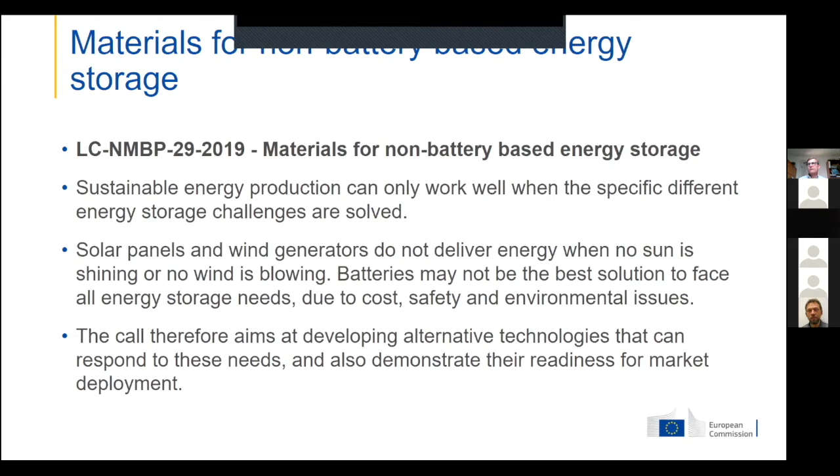So that's why we saw the need to develop alternative technologies to be able to deal with this problem.

And the obvious choice already at that time was, of course, either power to gas, power to chemicals, or power to liquids, also popularly called power to X, simply because of the amounts that we needed to store. There were other things, like in other time periods, compressed air energy storage, which could be used in the same manner, but it's a different time segment. And therefore, we needed to be able to cover the full time span of energy needs.

And one of the fundamental things about doing this is, of course, that we needed improved materials that had increased performance and also a reduced cost in respect to the available ones. And this is not something that comes easy. I mean, we can come up with new materials, but generally at the beginning, they're always more or much more expensive than the ones that are there.

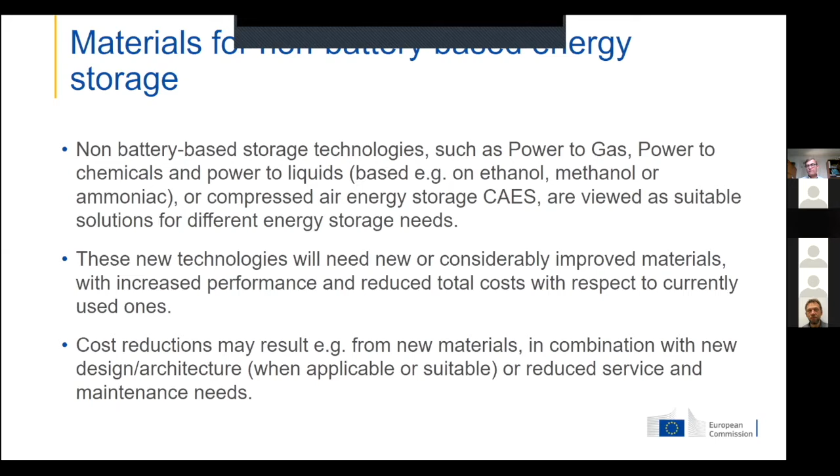And therefore, we simply needed to bootstrap this thing to be able to make new materials, in combination with new designs, architectures, and for instance, also reduced maintenance needs in order to be able to overcome this. So this was a very, very important topic for us at the time, and I think that it actually remains a very important topic. So what we've started with this call is by no means the end.

And that's why we need to pursue these goals also in the new framework program, Horizon Europe. And here we're going to be very ambitious in comparison to before, because we're going to change the strategy a little bit. So we will focus on scientific and technological excellence and strengthen the whole fundament for this in science and technology. And therefore, we also need to tackle political or policy priorities. This we've not really done to the same extent before. There we were doing point sources, a little bit here and a little bit there, but we were not really connecting the dots.

Today, we need to connect the dots in the whole value chain in order to be able to do this. And that means taking into account also the society as it is and the economy, investments to boost the innovation uptake and competitiveness. And therefore, we also need to make sure that everyone has a job, because otherwise it doesn't really matter. So the vision that we are pursuing is simply to have a sustainable, fair, and prosperous future for the whole of this planet.

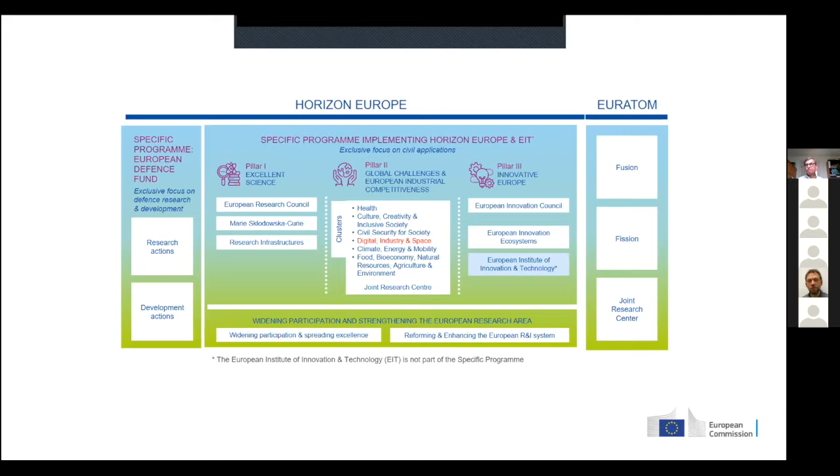One of the most important parts of Pillar 2 is Cluster 4, because it includes some of the activities important for industry. That means 4 DGs are working on this together: DG Connect, DG Grow, DG RTD, and DG DEFIS.

What we're going to try to do is accelerate the twin transition, as we normally call it - the green and digital transition - by working together so we can master the technologies and deploy them. We also need to make sure we have the autonomy to do this, meaning the means, raw materials, and structures, so that at the end of the day we can have a more climate neutral, circular, and clean industry, because that's the part of competitiveness which is absolutely necessary for us to succeed.

That means we need not only the industry with us, but also the people working in the factories, and we need society to help us launch this. Because we can come up with the best technology in the world, but if people don't want it in their backyard, we have nowhere to go. We saw that with other technologies that may or may not be important for the future, like nuclear energy - nobody wants a nuclear power plant in their backyard. We need to make sure everyone shares the burden for this.

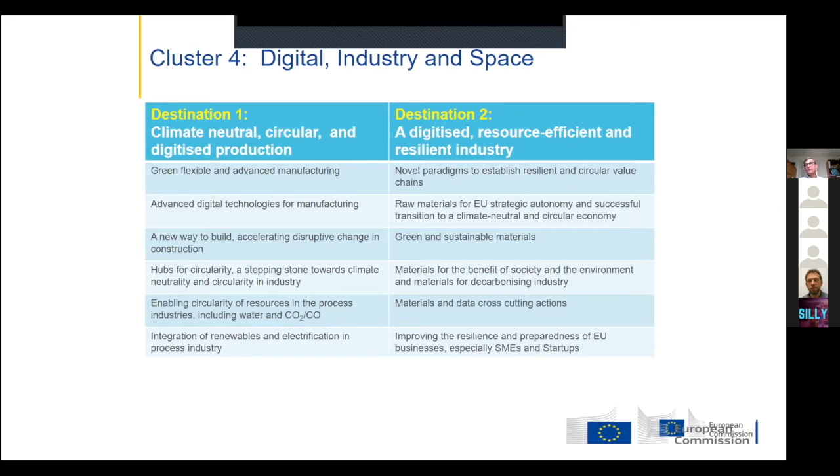We need to make sure we can cluster the activities in the right way, just like what you're doing here in terms of non-battery energy storage in general. So what is all this? You're the experts actually in this field.

I think we all know we need to integrate the technologies to achieve the goals we've set. It's not straightforward because it contains so many different elements - it goes all the way from making new composite materials for wind turbine blades, to new coatings on different things. These are very complicated things if we want to make them sustainable. And we need catalysts, which is pretty obvious, at least for us.

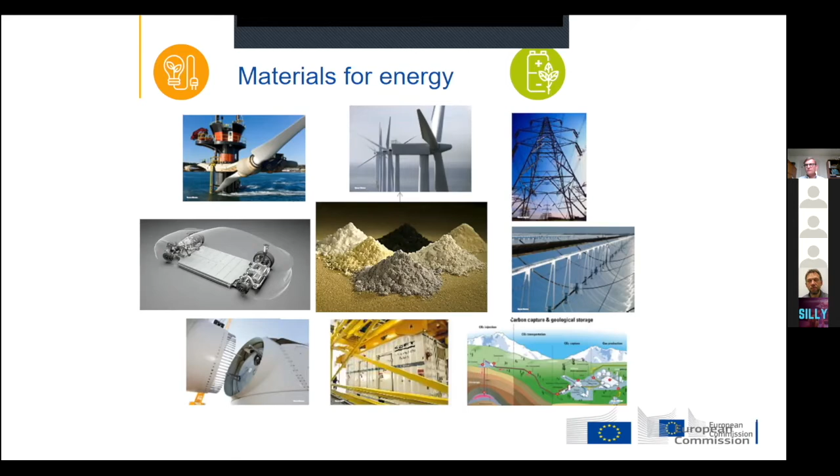We also need other things like membranes, surface coatings, and then the whole integration of all these things along the value chain. It's really important, because if we cannot demonstrate throughout the value chains that we're able to do this, we've actually achieved nothing. Then we have a technology that may be very nice, but we cannot show it's actually ready to go on the market. And that's what we have to do.

So the way that we need to go about this—and I'm not saying that this has to be the same for every field that we're dealing with—but we need to design the new materials that we have according to what the system's needs are. That means we need to start with some of the materials that we have. We need to model them to make new materials, to make them better performant and more cost effective, so that we can boost the whole transition, and also make sure that the materials we're using are actually available. Because we may have the nicest of product, but if it cannot be recycled, or if we do not have the critical raw materials to do this, then we are nowhere.

So we need to work along the value chain. We need to design them. We need to optimize the material. We need to be able to produce them, and we need to put them on the market.

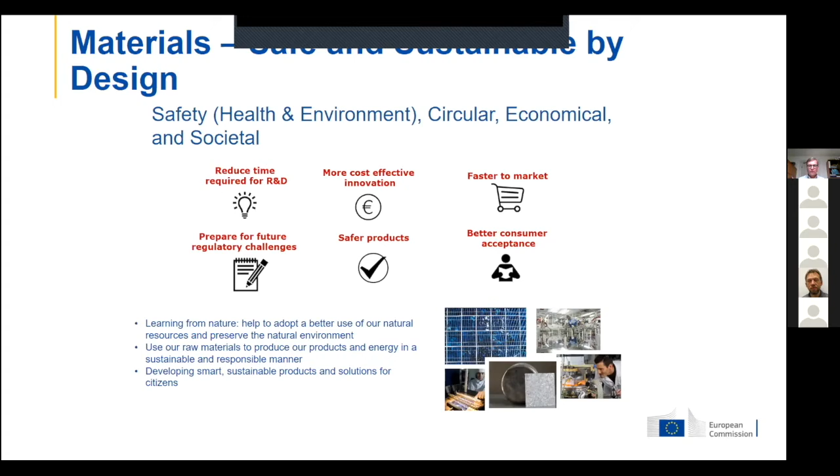And one of the elements to be able to do this is actually pretty fundamental—I think we've all at one point in time been exposed to this. If we cannot characterize it, if we cannot see the materials and measure its properties, then we cannot really use it for anything. Because in order to model materials, we need to have accurate data, and accurate data comes with better characterization.

So for us, linking characterization with modeling and development of models is absolutely essential. And like this, we can make new models that will allow us to make better and more efficient materials, so that we can model the whole value chain—not just the material itself, but also the actual CO2 carbon footprint of these processes. Because otherwise we're just spinning our wheels. It should not be gate to gate, but cradle to grave or cradle to cradle evaluation of the footprint of these things.

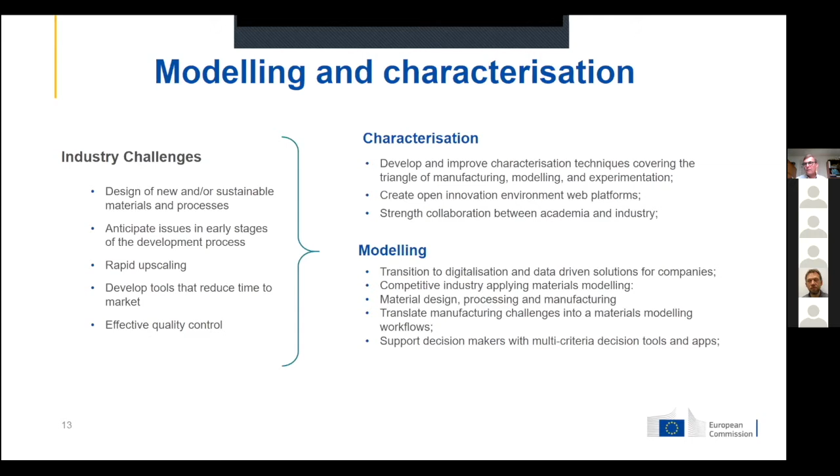And just to give you a few examples of what we're going to do in the future—and it's really not exhaustive, because otherwise I could use a whole presentation about this—there are some essential elements, and we're going to pursue all these things throughout this work program, but we cannot do everything at the same time. That's why we tried to prioritize those things that are most important first.

One of these things is the valorization of CO and CO2 streams into value-added products of market interest. We have new electrochemical conversion routes, and you're going to see several examples of these systems in the next presentations. It's really important that we have a broad palette of different technology options for doing this, because the catalytic systems we're going to need for the future are going to be completely different, or potentially completely different, from the ones we have now, because we're changing the systems.

And that means we also need to have an integration of hydrogen, for instance, as one of the major elements in this whole chain for replacing fossil fuels. This is not going to be easy—it's going to take a long time, because we all know that making hydrogen has a big energy penalty. The more we can reduce this energy penalty for making hydrogen, the more we can have hydrogen available to use.

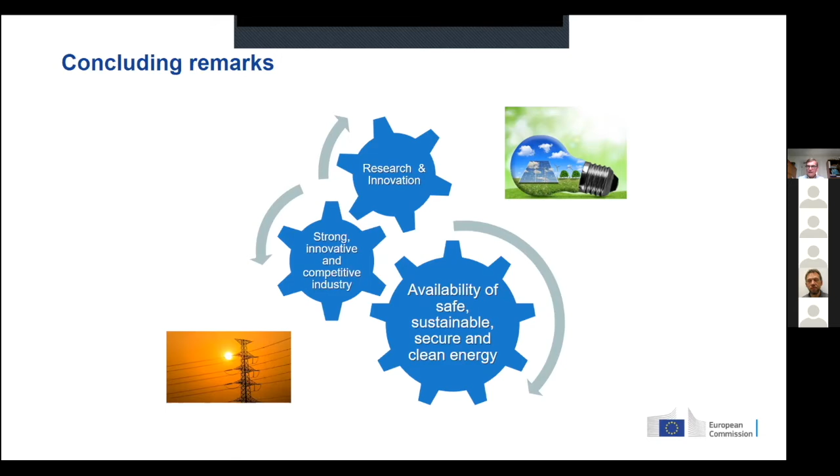So with that, I would like to thank you for your attention, and you can get some more information also about HADEA, which is a new agency, on the blog. And I'm at the moment heading the industrial technologies of that. So I'd like to thank you very much for your attention, and I wish you all the best for the rest of the workshop. Thank you.

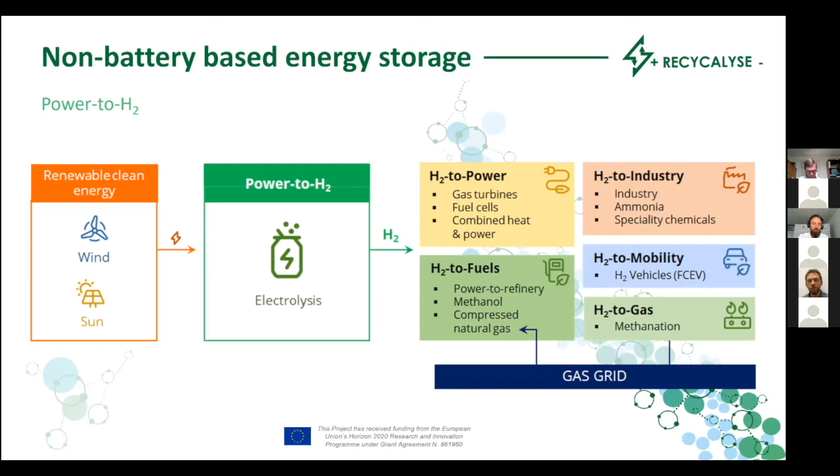Hydrogen can be produced from electrolysis, and that could be from renewable energy sources, and it can work as an energy storage medium. It can also help to overcome the irregularities of renewable energy sources. And then it can possess a very great potential to limit the use of fossil fuels in the near future.

So on to electrolysis. There are several types of electrolyzers. I've listed some of the most well-known, which are first in the development. We have proton exchange membrane electrolysis, we have alkaline, we have solid oxide. They all have different pros and cons. This project is about proton exchange membrane electrolysis, or PEM electrolysis, where water is decomposed into oxygen and hydrogen using electricity.

The PEM consists of an anode electrode, typically with an iridium-based catalyst. We have a cathode electrode with a platinum-based catalyst. And then we have a proton exchange membrane separating the two electrodes. This whole construction we call the membrane electrode assembly. And this membrane, it allows for protons to travel through to recombine and produce hydrogen at the cathode.

The use of this membrane, which has a low ohmic resistance, has several advantages. First of all, it enables a very high efficiency of the PEM. It can operate at very high current densities. It can produce hydrogen at high pressures and also with high purities. And then we need no special safety equipment for operating the system. We use only clean water.

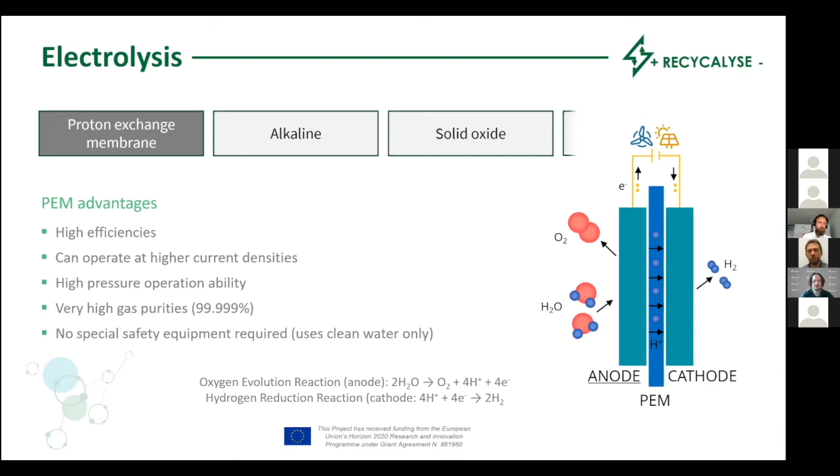This project here is about the materials at the anode, which are the most expensive and where materials development can have the most influence on the performance. And I will go a little bit deeper into that.

So the anode materials typically consist of these critical raw materials, iridium and also sometimes ruthenium. They are also called platinum group metals, and they belong to a group of extremely low volume elements. So they are very expensive, and not produced in very high rates. It's only around 10 tons a year for both of them, which is very low. And they have very huge CO2 emissions during the mining, especially for iridium, and they are also mined outside the EU.

All this causes significant barriers for the economy of these PEM electrolyzers and for hydrogen storage production. Actually, iridium and ruthenium are byproducts of platinum mining, so we have platinum also at the cathode, but used in smaller amounts.

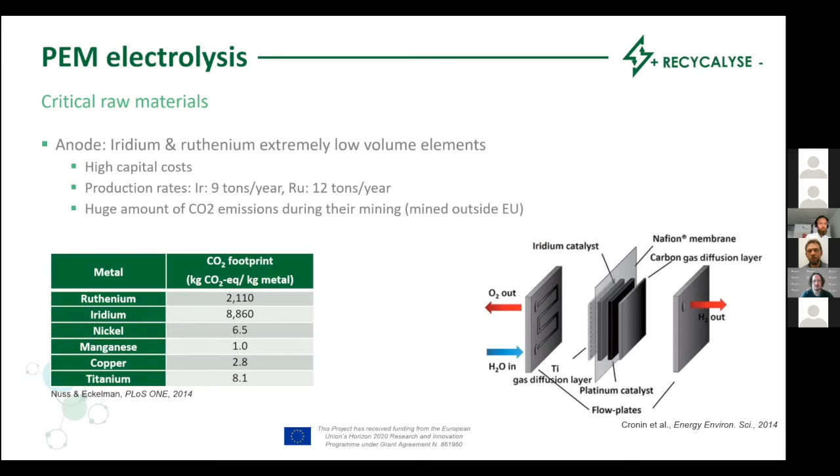All this tells us that we need new, improved materials for us to develop the PEM electrolyzers. So we need increased performance, reduced total cost, and increased recyclability. And this is in fact what the project is about.

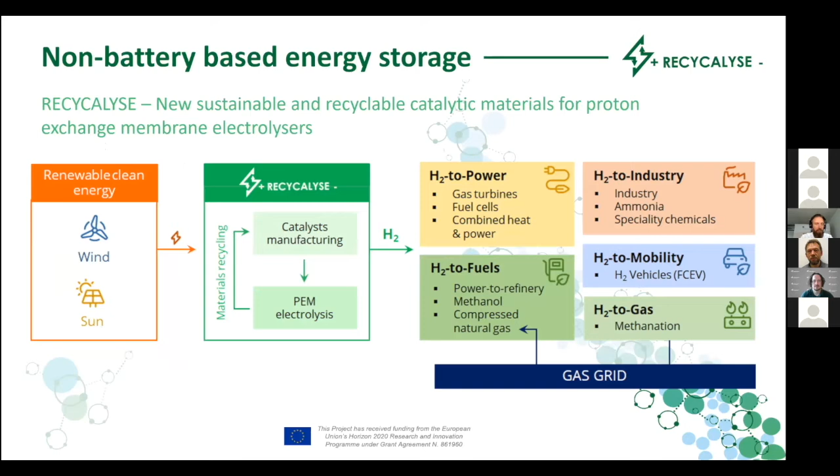In the RECYCALYSE project, we address the entire value chain of the PEM electrolyzer, all the way from catalyst manufacturing to system integration and demonstration, to end-of-life recycling, and then to supply raw materials for the catalyst manufacturing again from the recycled materials. The goal is to overcome the main existing barriers for PEM electrolyzers to penetrate the market, namely the price, accessibility, and performance of electrocatalytic materials.

To achieve this, we have two main objectives. First, we want to develop and manufacture highly active, sustainable oxygen evolution catalysts, which will reduce and eliminate the use of critical raw materials, thus decreasing CO2 emissions and reducing cost. Then we also want to establish a recycling scheme for the proton exchange membrane electrolyzer catalyst, for the electrodes, and for the overall system. By implementing all the recovered elements here in the new developed catalyst from Objective 1, we will reduce the dependence on materials import in Europe, and we will reach a circular economy.

So the circular economy is also depicted in the concept of the project, where we start with the catalyst production, where we need raw materials. We integrate the catalyst materials in electrodes for the device fabrication. These electrodes, via what we call membrane electrode assemblies, are utilized in electrolyzers for the production of hydrogen.

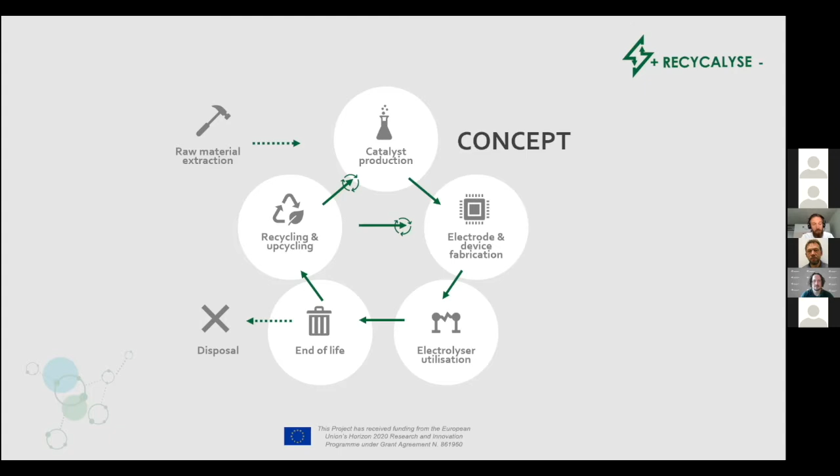Then we look at the spent membrane electrode assemblies, and see how we can recycle the materials, both in terms of recycling the critical raw materials themselves, creating new metal salts and new precursors for catalyst production, but also looking at these membrane electrode assemblies, how we can reactivate them and utilize them again for new device applications, and also how we can recycle the entire system, looking at, for example, the titanium flow plates used here.

All this is also reflected in the expected results. We have a result where we expect to have new stable catalyst materials with improved activity. We have more or less three groups of materials: supported iridium ruthenium oxide catalysts, catalysts with reduced critical raw materials where we alloy these catalysts with earth-abundant elements, and completely critical-raw-material-free catalysts.

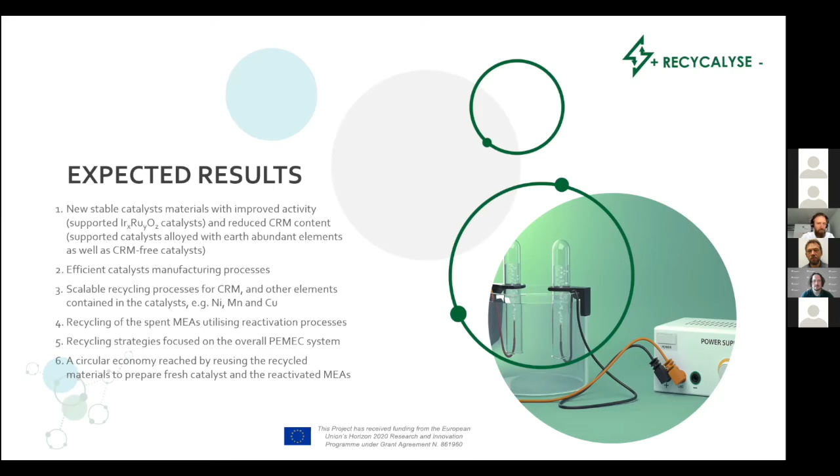We look into how to efficiently manufacture these catalysts, and how we can scale the recycling processes for critical raw materials and other elements contained in the catalyst, such as nickel, manganese, and copper. We look at recycling of the spent MEA, the membrane electrode assemblies, utilizing reactivation. We look at strategies for the overall PEM system, and then in the end, we want to have a circular economy by reusing the recycled materials to prepare fresh catalysts and reactivated membrane electrode assemblies.

Related to the concept, our project consists of 5 topics. We have materials, where we look at both catalytic sites and support materials. We have fabrication, where we look at fabrication methods for the catalyst, and fabrication of electrodes and MEAs. We demonstrate the electrolyzer systems where we use MEAs from the fabrication in a stack. Then we look at circular economy, where we look at materials recycling. And then we also have outreach and business development for the results obtained in the project.

So now I will give a small run-through of the different topics here, and then I'll give some highlights of the results achieved so far. The project is almost halfway through. It's a 3-year project, so a lot of these things will be preliminary.

Our approach, as I briefly mentioned before, for these novel electrocatalysts is to utilize support structures. This is inspired by fuel cell catalysts, where you use carbon supports, for example, for platinum nanoparticles. But here we have much higher demands on the support because of the high potentials and oxygen atmosphere at the anode. So the use of a support will enable the use of smaller catalytic particles. This will give a higher surface area and thus higher activities, but at the same time the support will make sure that we still get nice porosities in our electrodes.

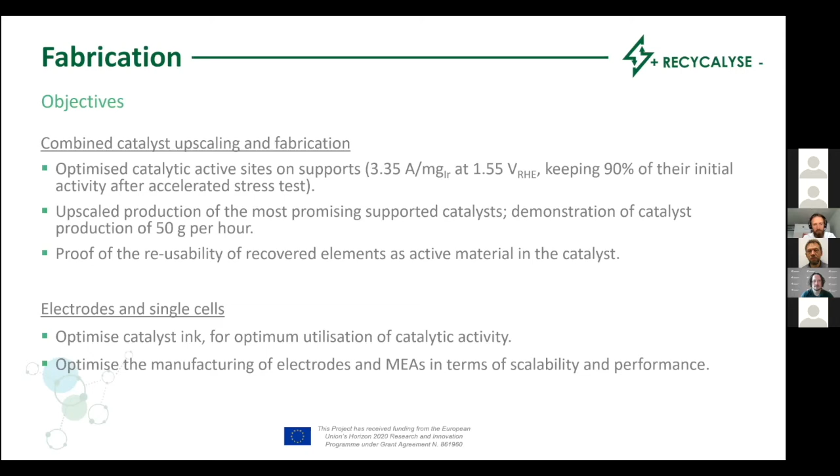We also look at the electrodes and the single cells, how to incorporate these materials, how to optimize the catalyst ink for the deposition onto electrodes. We want optimum utilization of the catalytic activity. This ink is going to be a bit different from, for example, standard iridium black catalyst because of these support structures. And we want to optimize the manufacturing of electrodes and MEAs in terms of scalability and performance.

For the demonstration, we will assemble a full PEM electrolyzer system using the materials from before in a developed stack. We will develop an electrochemical model combined with an overall system model for an optimized PEM electrolyzer system. Then we will test the functionality of the stack and the system.

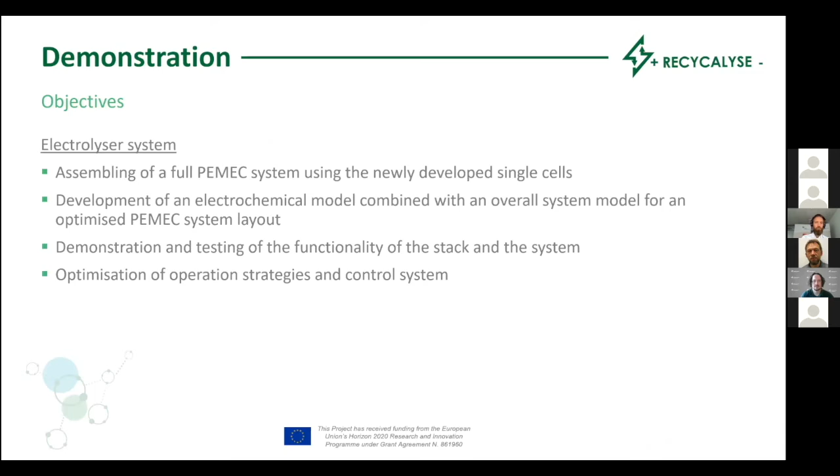For the first version of the stack, we have defined the specifications. We have assembled the stack, which consists of 14 membrane electrode assemblies. We have prepared the test stand for the stack and developed a control strategy for it. This control strategy is simulated based on information from the materials development and fabrication, and it contains both a control model and a stack model. We should be ready for a demonstrator test next month.

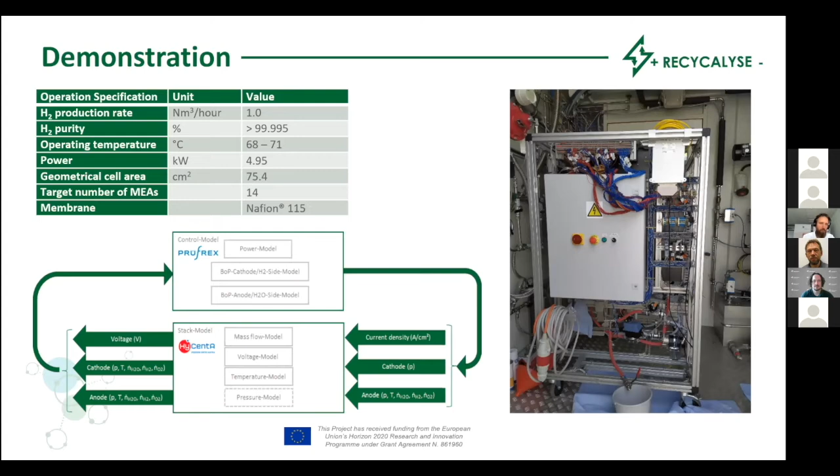So moving on to the circular economy, where we look at the following objectives for materials recycling. We look at the recycling processes for the recovery of the critical raw materials, so recovery of these platinum group metals, iridium, ruthenium, from spent catalysts, where we want to achieve more than 90% efficiency.

We also look at the separation of the elements for iridium, ruthenium, and platinum from additional metals in the catalyst or from contaminating elements. We also look at reactivation of electrodes using cathodic reactivation, where we can directly reuse the membrane electrode assembly.

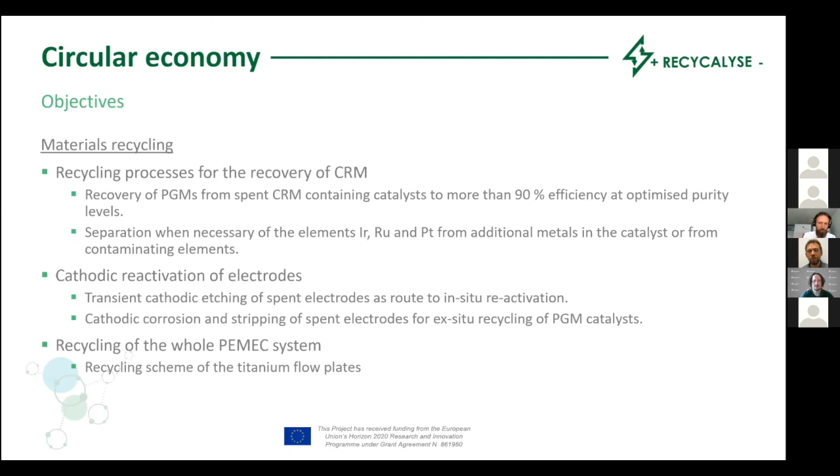And then we also look at the recycling of the whole PEM electrolyzer system, where we want to create a scheme where we also get the titanium flow plates back. So we've developed a scheme where we first do an automated dismantling of the titanium flow plates and the MEA structure. The MEA is then pre-treated in an alcohol water mixture to dissolve the catalyst materials.

We call this the dry residue, and we want to dissolve that from the membrane and the electrodes. This residue is then leached using a hydrochloric-based solution, creating PGM chloro complexes. Here we have achieved leaching efficiency, in this case for platinum up to 100% and for ruthenium up to 90%.

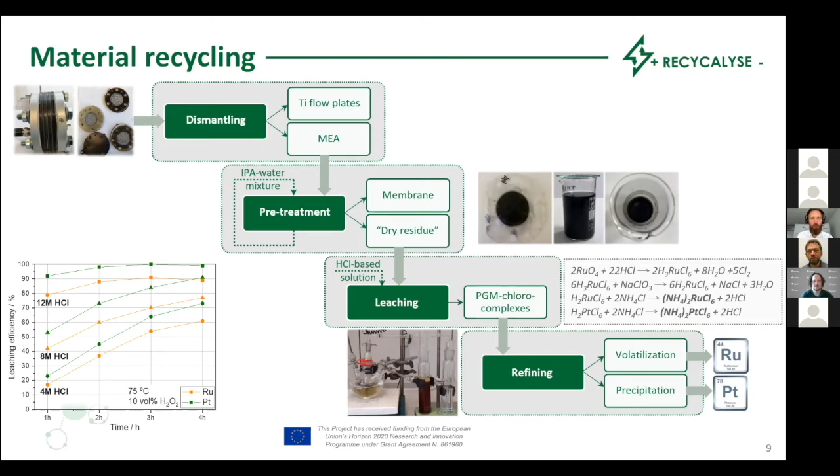We then refine these complexes, creating the final PGM precursors, which is followed by a separation step, volatilization for ruthenium and precipitation for platinum, where we can get the individual precursors. These precursors are now ready for us to test them for synthesis of our materials.

So, as mentioned before, we are halfway through the project. And if we keep the goal in mind that we want to overcome the main existing barriers, which is the use of these PGMs, we can see that the usage of these support structures has great potential for reducing the critical raw materials. We're already beyond state of the art by using support, before even making the alloying of non-critical raw materials really work.

This is still work in progress. We can see so far that the use of completely non-critical raw material catalysts can be a very huge challenge; it's still also work in progress. We need to still optimize the material utilization in the membrane electrode assemblies. We can see so far that we can most likely lower the catalyst loading quite a lot, also with the current materials, while keeping good performance of the membrane electrode assembly.

The first generation stack, as I mentioned, is ready for system implementation and demonstration. We will have a second generation stack to produce later on the project, and recycling of the project-developed materials is in progress, and we are now ready to use the first precursors for new catalyst. With that, I would like to say thank you for your attention.

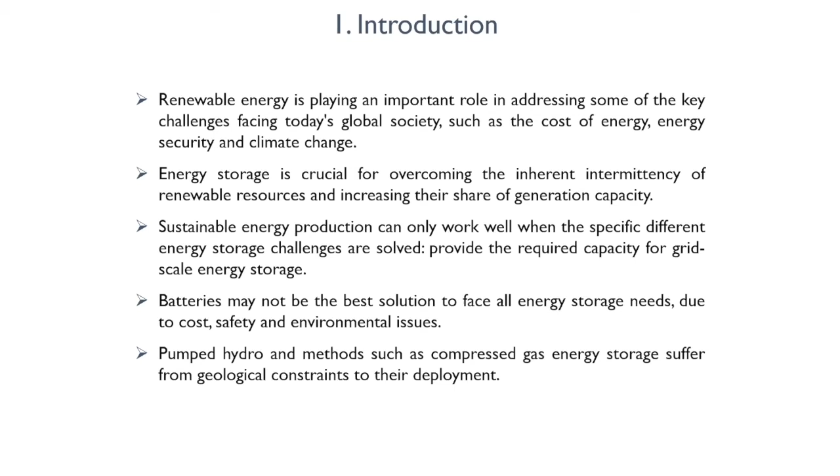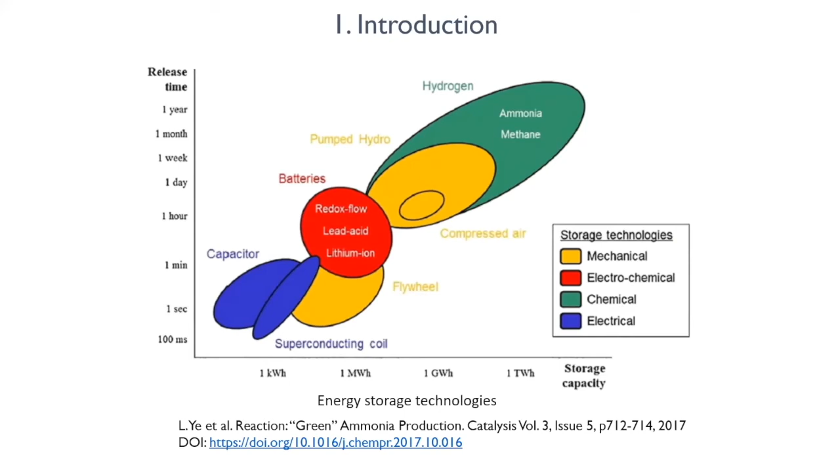So the non-battery based storage technologies have power to X, like power to gas, power to chemicals, or power to liquids, that could transfer renewable electricity into synthetic gases, hydrogen, methane, or other gases or chemicals, are the more suitable solution for different energy storage needs. So the point is we have to have sufficiently flexible mechanisms to allow large quantities of energy to be stored over long time periods at any location - this is chemical energy storage via hydrogen or carbon neutral derivatives.

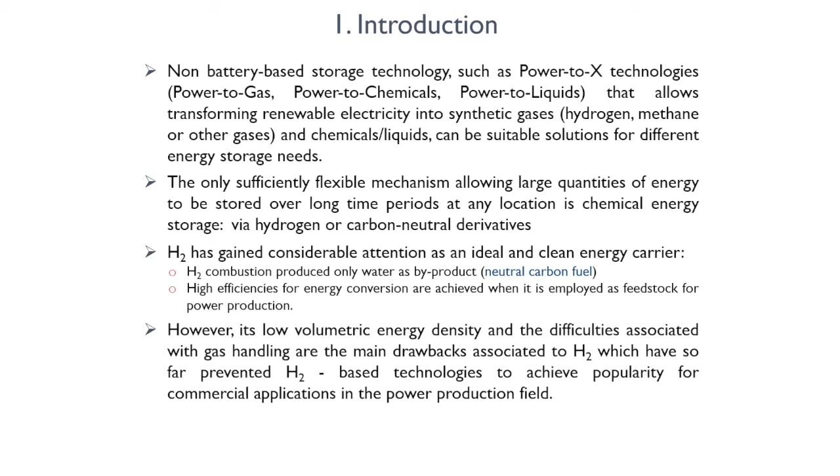Just click one more time, please. So between these, hydrogen has gained considerable attention as an ideal and clean energy carrier, because they produce water as a byproduct and has high efficiency for energy conversion when employed as feedstock for power production. But one drawback is the low volumetric energy density and difficulties associated with gas handling of hydrogen. So the best way - just click one more time - the solution is to have the hydrogen stored in chemical bonds or hydrogen carrier compounds.

So this next, use press. Yeah, why ammonia? Ammonia, because it has a high volumetric energy density between the zero carbon fuels, higher than the one we can obtain with hydrogen. It has a relatively low cost, easy to be liquefied. It can be liquefied at room temperature with 7.6 bar gauge, for instance, at minus 33 degrees centigrade, 1 atmosphere.

Easy to store and transport. We already have large knowledge about the transport and storage of ammonia due to the use of ammonia for fertilizer as a feedstock for developing fertilizers and their chemicals. And the main issue is it's carbon free.

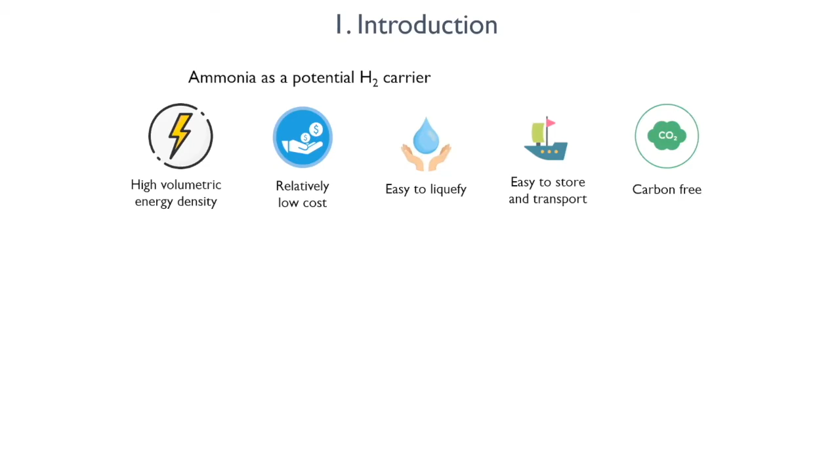Ammonia is made of nitrogen and hydrogen. We can store it for the time we need, and then use it directly for energy production, as fuel for internal combustion engines, or as fertilizer. You can also produce hydrogen via ammonia decomposition for use in fuel cells for electricity production, or for a hydrogen refueling station.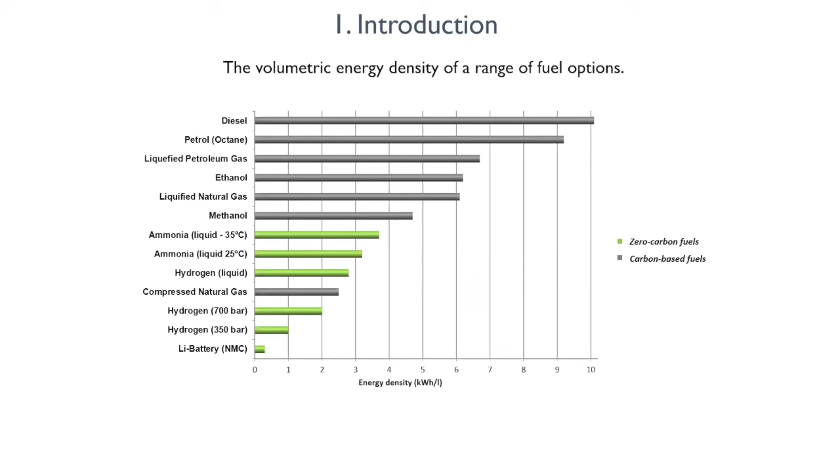This is why the AreNHa project aims to use ammonia as a green hydrogen carrier. For that purpose, it develops its main activities around green hydrogen production, ammonia synthesis, ammonia storage, ammonia decomposition, and other direct energy uses of ammonia. It's a 4 year project with funding of around 5.7 million euros.

The main goal is to develop, integrate, and demonstrate key material solutions that enable the flexible, secure, and profitable storage and utilization of energy in the form of green ammonia.

In the project, we are going to demonstrate the full power-to-ammonia value chains at TRL5, and the potential of green ammonia to address issues of large-scale energy storage.

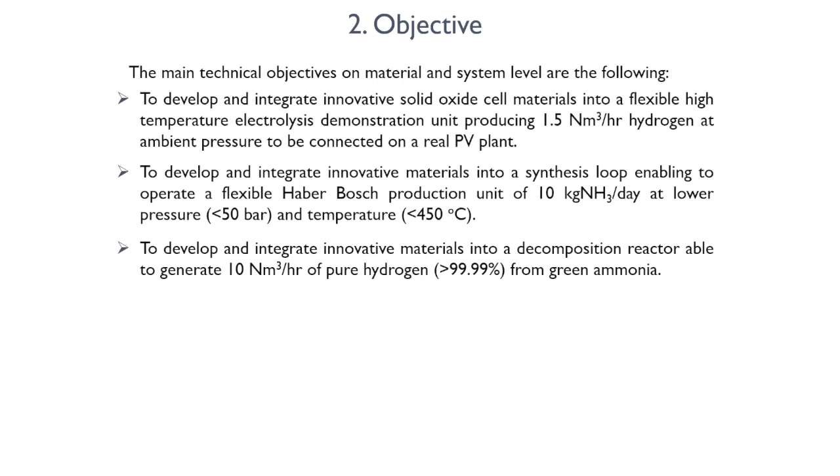The partnership includes 11 partners from 7 countries, with 5 SMEs and industries and 6 research centers and universities from around Europe.

Here you see what we're going to do in the project. We are going to develop new materials and processes at lab scale for green hydrogen production using high temperature electrolysis with solid oxide electrolysis cells. We will also develop nitrogen through an electrochemical process, as well as ammonia through an electrosynthesis process—so green nitrogen and ammonia production.

Then we are going to develop ammonia through an advanced Haber-Bosch process, and solid absorbents for solid storage. This will be used for ammonia decomposition via membrane reactors, to produce hydrogen that will feed PEM fuel cells and also a hydrogen refueling station.

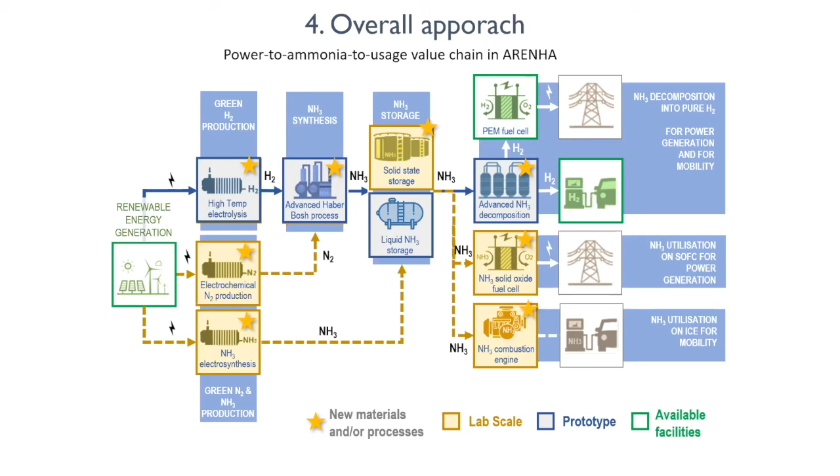Let's move to the next slide, please.

So the idea: we have the development of the materials, and for all the system we have the modeling part, studying the system integration as well. Then work package 4 is to develop the components for the prototypes, for the demonstration, and then we have the validation at Centro Nacional de Hidrógeno.

Proton Ventures is the company developing the Haber-Bosch process. In parallel, we have the business case led by ENGIE, a French company, addressing the market value chain, go-to-market strategy, and IPR — the go-to-market and business implementation of all these technologies. We also have a work package dealing with societal acceptance, environmental life cycle analysis, life cycle cost analysis, and safety assessment, led by ENGIE, with Centro Nacional de Hidrógeno also involved, plus dissemination, communication, and management activities.

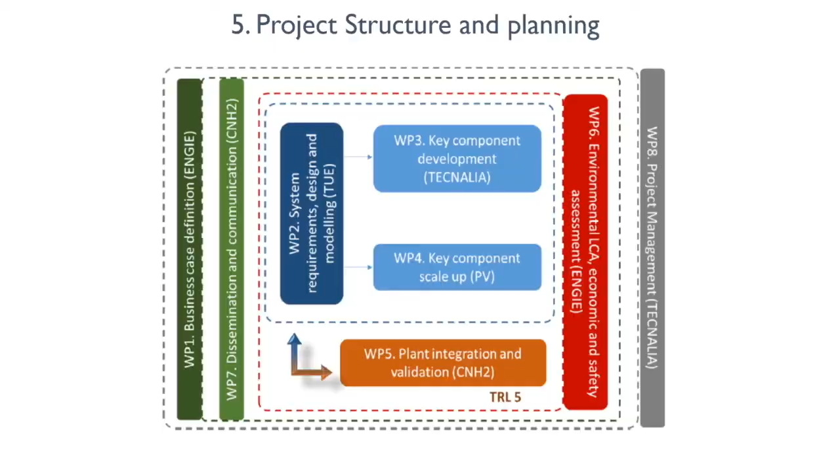Main impact: we have several impacts from the project. We decrease energy import dependency because we could use ammonia as fuel. We promote the integration of renewables, offshore or onshore. We deal with peaks when demand is high and there's a higher offer of renewables that is not stored or used in the grid, so we can develop hydrogen and ammonia for this, facilitating the integration of renewables in the power system with large scale energy storage.

We also promote strategic European leadership in energy storage and developing new technologies, and open the possibility to use ammonia as a fuel and energy supply from other countries besides Europe, because we can develop it in Europe too. So we are developing alternative energy imports or fuels using renewable electricity storage and long distance transportation.

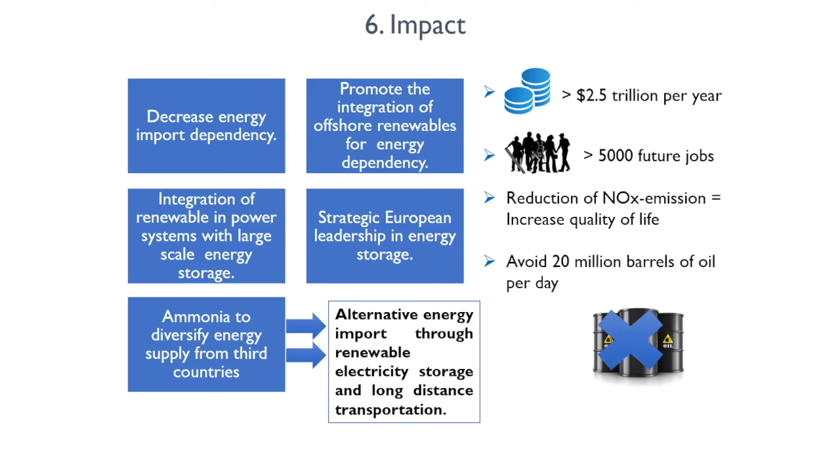As a summary of activities, we have already set up our website. As I told you, it's a 4 year project and we are at month 15. We have around 3 publications, one a long paper in conference proceedings, and including this and next week's conference, we have participated in 5 workshops.

We have already filed one patent request regarding the decomposition integration with the clean system. We have also released 2 newsletters, plus other press, a video, and some reports that can be seen on the website, and we have a LinkedIn.

Also, you can access and ask to adhere to the LinkedIn or Twitter on the website. Just click the next slide. Now I'm going to present some status on the progress.

Regarding the business case definition, we have already identified the initial market. We have done some initial market analysis to identify promising opportunities for ammonia as an energy storage solution, and to identify key stakeholders and competitors in the field. We have done an initial value analysis of the value proposition of the AreNHa concept, identifying the state of the art of the technologies, and underlining the peculiarity of the developed concept, including its impact on the end user, assessing the state of development at the end of the project. This will be case by case depending on the situation, and cost is a main impact for the business case as well.

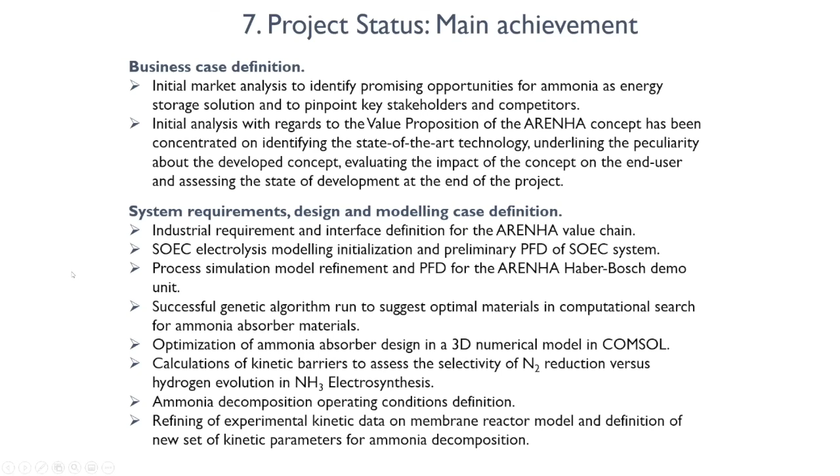Regarding components development, we have had an impact due to COVID, and also for the work pace, so we have tried to avoid delays in the prototype development. For the lab scale we can have some margin because they are not going to impact other work packages.

We have already developed SOEC for the first test using thinner electrolytes and improved electrodes for the IKTS layout. Elcogen has also developed different air electrode layers to improve their SOEC system. We have also developed some absorbent materials for the Haber-Bosch process.

Tecnalia has already prepared several palladium-based membranes for hydrogen separation, and we have also been working on palladium recycling for the palladium membranes. The Eindhoven University of Technology has already done some lab-scale permeation tests using single gas or mixtures of hydrogen, ammonia, and nitrogen on the palladium membranes.

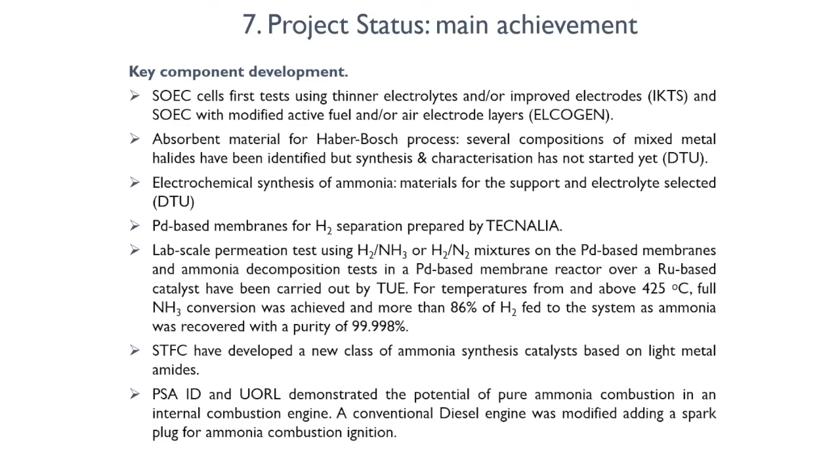Now I'll show some results from the membrane reactors. The idea to use membrane reactors is that you have the decomposition of ammonia into hydrogen and nitrogen, and the separation in the same place. So you have fewer systems, you increase the efficiency of the process, and you can decrease the size compared to a standard non-membrane reactor for ammonia cracking. You can achieve higher separation, hydrogen efficiencies, and conversion at lower temperatures and with higher values. Using a single unit also reduces the footprint of this technology.

I'm going to show you a few results. Please click next slide.

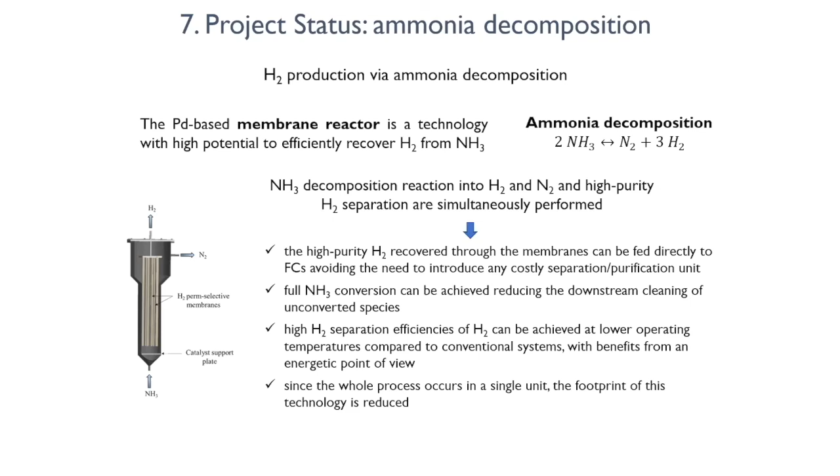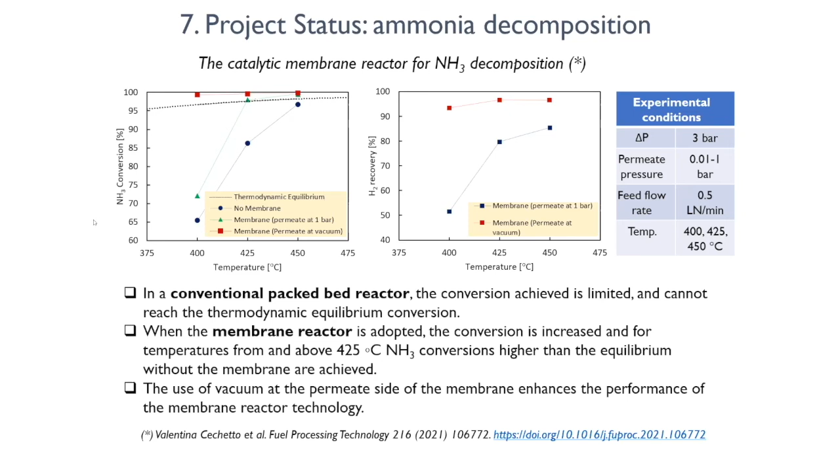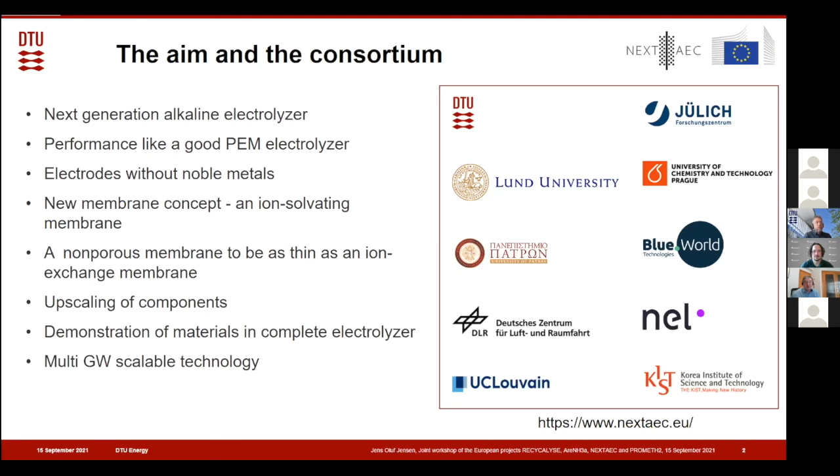So just an alternative to the ion exchange membrane that many groups are trying to develop these years. We are upscaling the components to a degree where we can do a demonstration in the Nel electrolyzer. The motivation behind this is, of course, to improve the technology and the rate capability, but also to have a fully scalable technology that we can take to the multi-gigawatt, even terawatt level. Very briefly, we have heard about the importance of energy storage and the...